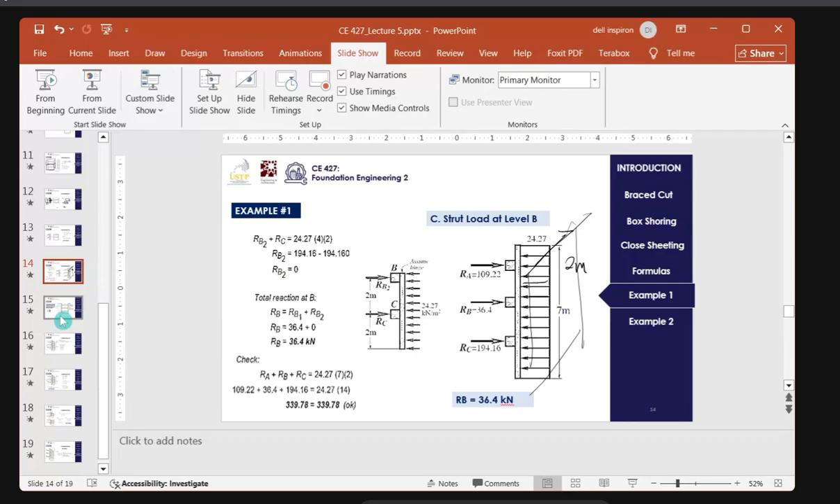Okay, for example number 2, the braced cut of 2 layers of clay is shown in the figure. The spacing of struts is 2.5 meters center to center. Compute the reaction of the strut at level A, B, and C.

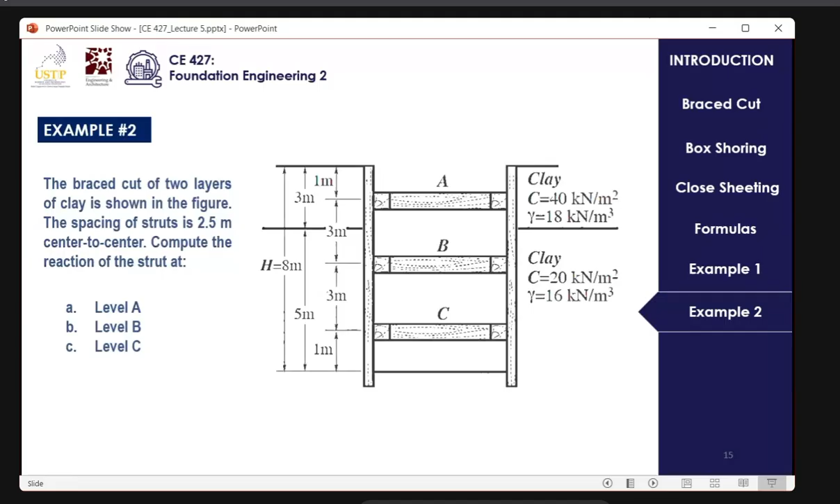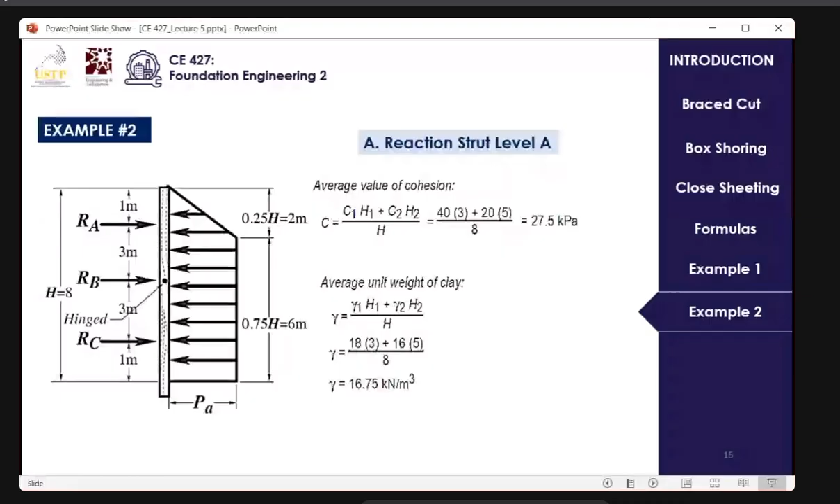And then, case 1 and case 2, γH over C is 4.87. Since mas greater man siya sa 4, atong gamiton nga pressure is γH minus 4C or 0.3γH, whichever is bigger. So pag compute nato, 24 and 40.2, mas dako man si 40.2, mao tong gamiton nga pressure diri. So imong pressure diri is 40.2.

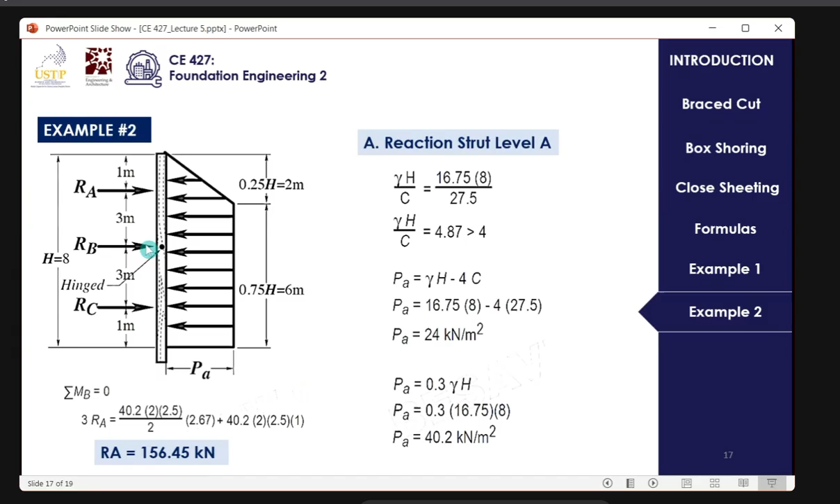For this one, summation of moment B, atong i-consider ang kaning upper na part. Okay. So that's basically force times distance lang gihapon. So that's 3 times RA. And then since duha naman ni siya ka area, we have here your triangle, and then you have here your rectangle. So how are you going to do that?

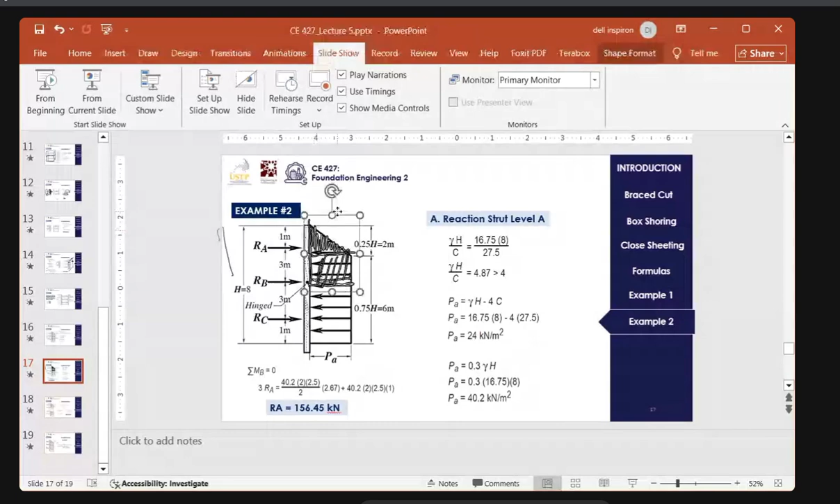So it's still stress times area ang concept gyapon ani. Or katong area method nga gihatag nako before nga 1/2 base times height. 1/2, imong base is 40.2, imong height is 2. 2, dili 1, 2.